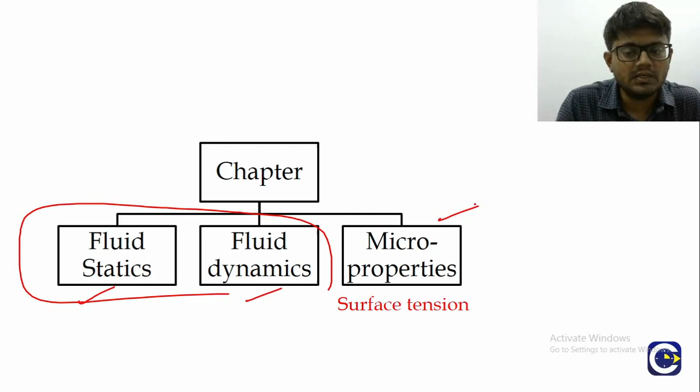Okay, so what is surface tension? Basically நம்ம day to day life we will do lot of observations. So இப்போ இங்க பாருங்க, ஒரு needle tip ல இருந்து we are releasing a water drop னு வெச்சுக்கோங்க. And the free state la the shape of the water drop பாருங்க இது எப்படி இருக்கா, spherical shape தானா? Okay, so when it is in free state it is taking the shape of a sphere.

இங்க மட்டும் கிடையாது, even if we look at the shape of the raindrops கொஞ்சம் distorted இருக்கும் because of the gravity effect, but கொஞ்சம் small drops நம்ம observe பண்ணா we will see that they will be almost like a perfect sphere. Okay வா, ஏன் இப்படி வருதுன்னா this is one of the effects of the surface tension.

அந்த மாதிரி we can also look at இது ஒரு ரொம்ப common experience, like the canal ஆகட்டும் or these marshy இதுல you will see that lot of mosquitoes and even these insects will be flourishing like anything. So they will flourish. We also will get affected because of some disease, etc.

Okay, so if you look at the way these mosquitoes or these insects will stay on the surface of the water, right? Like we can see here this insect paranga, it is keeping four legs abadi vechittu it is able to stay afloat on the surface of the water. How this is able to stay on the surface of the water? Again, this is because of the surface tension.

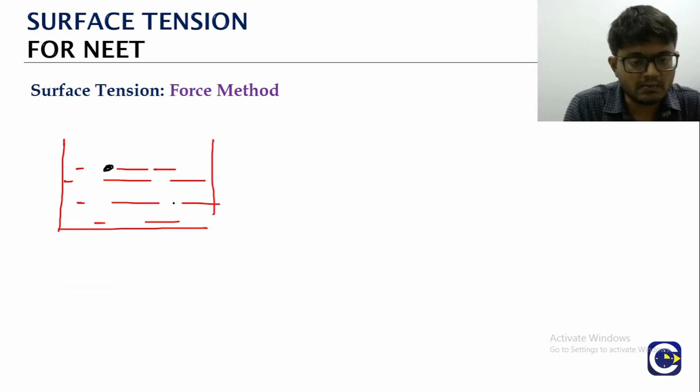Force method: for example நம்ம ஒரு vessel we are taking a liquid னு வெச்சுக்கோங்க, அதுக்குள்ள we will mark two liquid particles. இங்க பாருங்க, surface க்கு மேல ஒரு particle எடுக்கறோம், அந்த மாதிரி we will take a particle which is inside the liquid. இப்போ பாருங்க, the particle which is inside the liquid, the interaction forces with other surrounding particles அதெல்லாம் அப்படியே balance ஆயிடும். ஏன்னா that will be in all different directions. It will be attracted in all different directions. அதனால net force will become zero.

But surface க்கு மேல எடுத்தா அந்த point பாருங்க. This will only have the attractive forces in the lower hemisphere. மேல there is no liquid, right? அதனால it will only have the attractive forces in the lower hemisphere. அதனால the particles on the surface of the liquid will experience a net force downwards. Like somebody is just trying to pull them down. Because there is a net force downwards, there is always a tendency for these particles to go down, right?

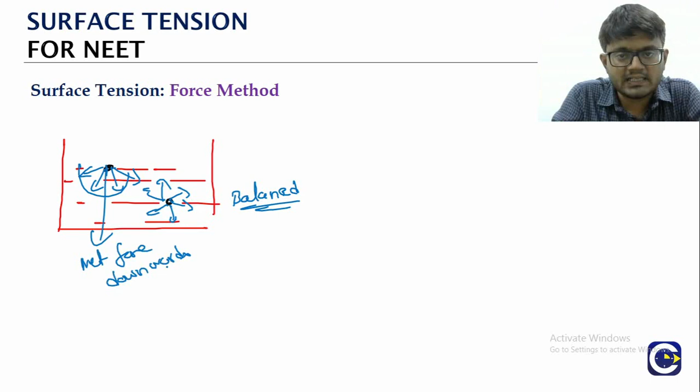So அதோட effect என்னன்னு பார்த்தீங்கன்னா the surface of the liquid will be always like ஒரு stretched membrane மாதிரி. So the surface of the liquid is going to be like what? It will be like a stretched membrane because of the unbalanced forces on the particles of that liquid surface.

இப்போ பாருங்க, இந்த சர்ஃபேஸ்க்கு மேல we are keeping ஒரு எக்ஸ்டர்னல் ஆப்ஜெக்ட் நம்ம பிளேஸ் பண்ண வச்சுக்கோங்க. ஒரு நீடில் ஆர் எனிதிங், wire or needle like that அப்படி நம்ம பிளேஸ் பண்ணா, because the membrane is stretched, right, அதனால என்ன தெரியுமா, there will be a force acting perpendicular to the length of the object.

நம்ம ஒரு wire மாதிரி ஒரு ஆப்ஜெக்ட் பிளேஸ் பண்ணா, there will be a force acting on the wire. It will be எப்படி இருக்கும், it will be perpendicular to the length of the wire. ஓகேவா? So it will be perpendicular to the length of the object. நம்ம எந்த ஆப்ஜெக்ட் அங்க பிளேஸ் பண்ணிருக்கோம் அந்த ஆப்ஜெக்ட்டோட length இது perpendicular இருக்கும்.

And இன்னொரு ப்ராப்பர்ட்டி என்னன்னா, this force will be along the surface of the liquid. எப்படி இருக்கும், the force will be along the surface of the liquid. இதுல இருந்து we will define the surface tension. பாருங்க, the surface tension generally என்னன்னா, we will indicate this with a symbol S or T. Capital S நம்ம யூஸ் பண்ணலாம், அந்த மாதிரி we can also use the symbol capital T.

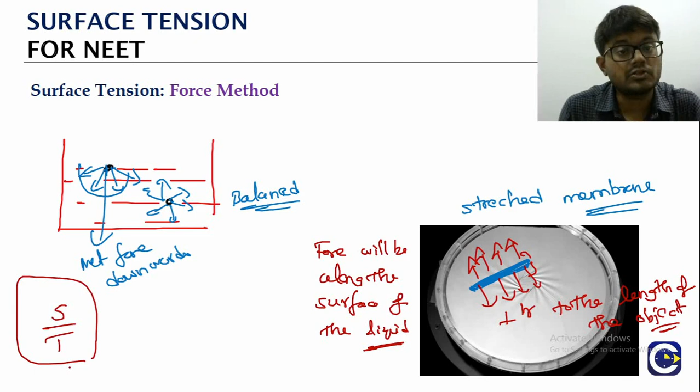Surface tension ன்னு சொன்னா this is not a force. ஏன்னா ஆல்ரெடி நமக்கு மெக்கானிக்ஸ்ல tension ன்னு சொன்னா the force inside the rope is called as tension. But surface tension ன்னு சொன்னா that is not a force. Okay, it is related to the force. எப்படின்னு பாருங்க, if you take what is the force acting per unit length, the object oda length நம்ம L எடுத்தா, the force acting per unit length of the object, right, that is what we will be defining as the surface tension.

ஓகேவா? Surface tension எப்படி நம்ம டிஃபைன் பண்றது, இப்போ நம்ம ஒரு wire or needle or a straight object நம்ம place பண்ணா, we can see what is the force acting per unit length. That is what we will be taking as the surface tension value. ஓகேவா? So இப்போ பாருங்க, based on this definition, what will be the SI unit? ஏன்னா force ஓட SI unit என்ன நியூட்டன், length ஓட SI unit என்ன மீட்டர். So it will be நியூட்டன் per மீட்டர்.

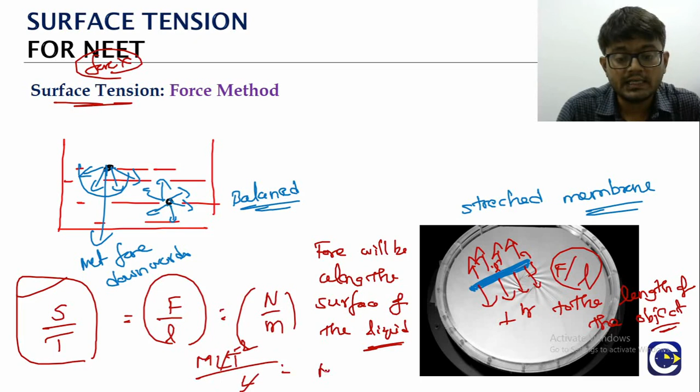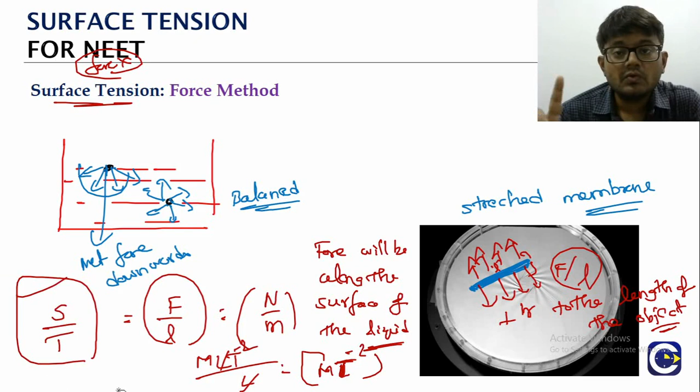அது மட்டும் இல்ல, we can also tell the dimensional formula. இங்க பாருங்க, force dimensional formula என்ன, M L T power -2 தானா, divide by length means L. So பாருங்க, L வராது, M T power -2. So this is the dimensional formula for the surface tension. Okay va? So this is how we will define the surface tension by using the force method.

Okay, so இப்போ பாருங்க, we can just look at the same in the observation. Like நம்ம ஒரு small weight needle surface of the water மேல place பண்ணா, you will see that the needle will be floating. ரொம்ப heavier needle place பண்ணா அப்படி float ஆகாது, ஏன்னா that will go down. But if you are keeping a light needle water surface மேல place பண்ணா, it will be floating on the surface of the water. ஏன் தெரியுமா? The reason is in the surface tension.

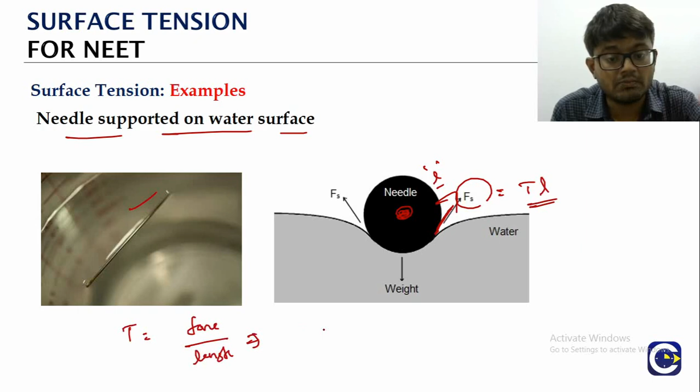அதுக்கு என்ன ஃபார்முலா பாருங்க, if the length of the needle நம்ம L எடுத்தா, force due to surface tension எவ்வளவு வரும், ஏன்னா surface tension is force by length தானா. So the force that will come due to the surface tension will be equal to surface tension value into the length. இந்த பக்கம் என்ன பாருங்க, it will be T into L. அந்த மாதிரி இந்த பக்கம் இங்க ஒரு surface இருக்கா, so it will be T into L.

So there will be two forces acting along the liquid surface. ஏன் இங்க along the liquid surface ன்னு சொன்னா it is not horizontal, because the membrane is dipping. இப்போ பாருங்க, இந்த ரெண்டு ஃபோர்ஸோட ரிசல்டன்ட் நம்ம எடுத்து வச்சுக்கோங்க. இங்க என்னன்னா we need to understand about one more thing called as the contact angle.

So எந்த ஓரியன்டேஷன்ல இது ஆக்ட் ஆகும்னு we will be able to understand this by using the concept of contact angle. கொஞ்ச நேரம் கழிச்சு we'll talk about the contact angle concept. அப்ப we will see what will be the direction of this force due to surface tension. இங்க அதோட ரிசல்டன்ட் நம்ம எடுத்தா it will be upward direction தானா.

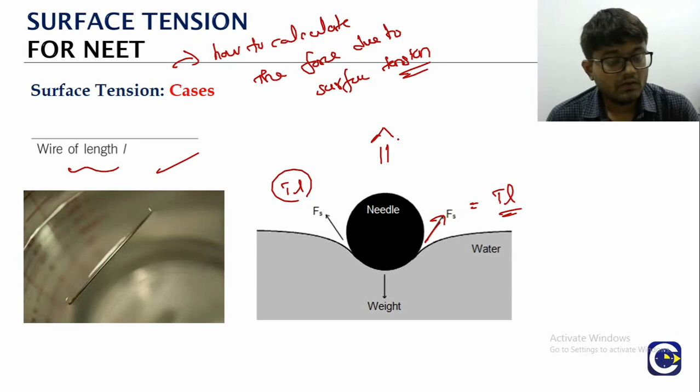Whatever is the angle, the net resultant will be upwards only, but the value changes depending upon the angle, right? The resultant's value changes. Okay? So because of that it is able to balance the weight of the needle, and that is why the needle will be able to float on the surface of the water. Okay? So this is the case of a single wire.

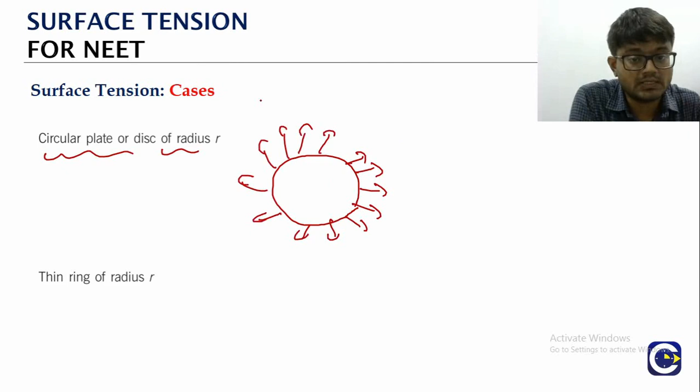Similarly, if you are keeping a circular plate or a disc of radius r, if we place a circular plate or a disc, see, what is the total length on which the force will be acting? The force will be acting on the entire circumference or perimeter, right? So what is the total length? It is the circumference or perimeter, 2 pi r, into the surface tension. Okay? So the force acting on a circular plate is 2 pi r into surface tension.

Similarly, if you take a thin ring of radius r, so what is the difference with a ring? The ring will have the mass of the material only on that outer boundary.

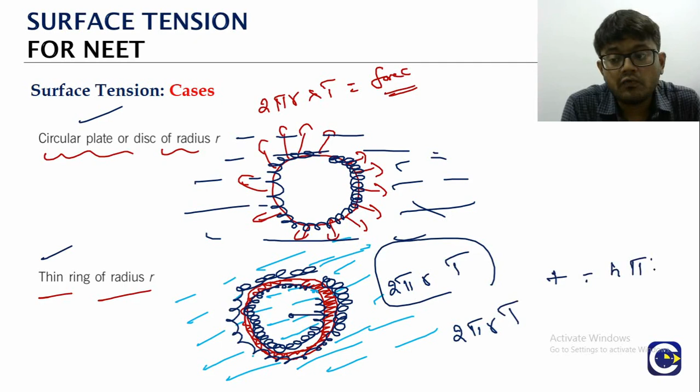So பாருங்க, if you consider the ring is thin, the inner radius க்கும் outer radius க்கும் அந்த அளவுக்கு டிஃபரன்ஸ் வராது. So we can take inner force to be 2 pi r into t. அந்த மாதிரி outer force is also 2 pi r into t. ஆட் பண்ணா it will be 4 pi r into t. Okay வா? Because the ring will have two boundaries. One the inner boundary, ரெண்டாவது outer boundary.

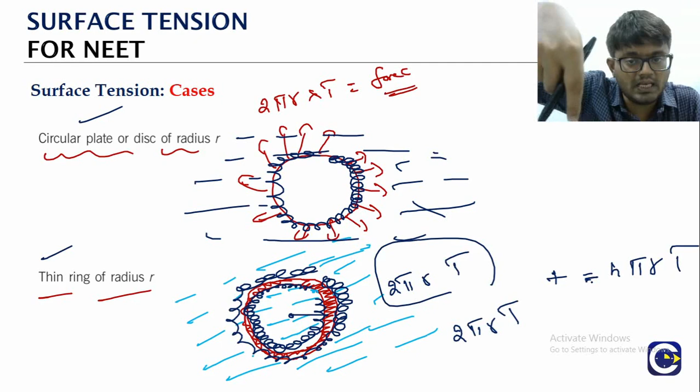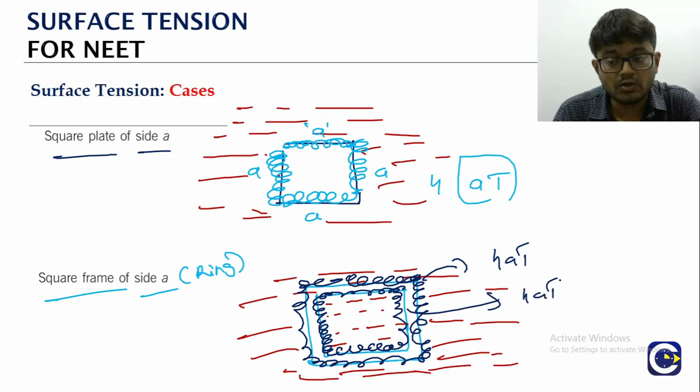So what we can take, this is like 4a into t. இதுக்கு முன்னாடி தான் ரிசல்ட் பார்த்தது. அந்த மாதிரி உள்ள இருக்கிறதுக்கும் ஒரு 4a into t வரும். டோட்டல் 8a into t. So square frame எடுத்தா 8a into t, because we are having two boundaries. அந்த மாதிரி if you take a hollow disc of inner radius r1, outer radius r2, it is also called as annular disc ன்னு சொல்லலாம்.

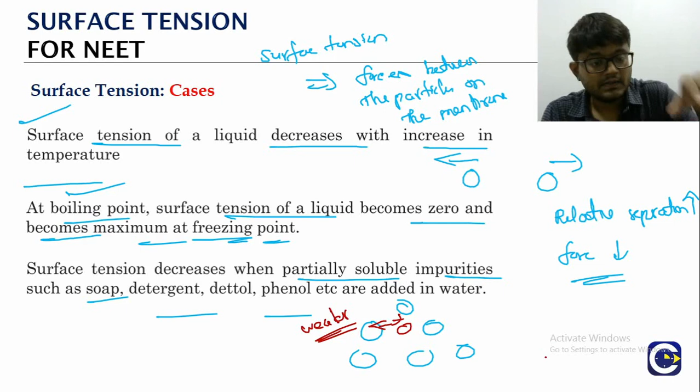The force of interactions between them are stronger, so the surface tension value will be increasing. In the same way, by giving a charge to a soap bubble...

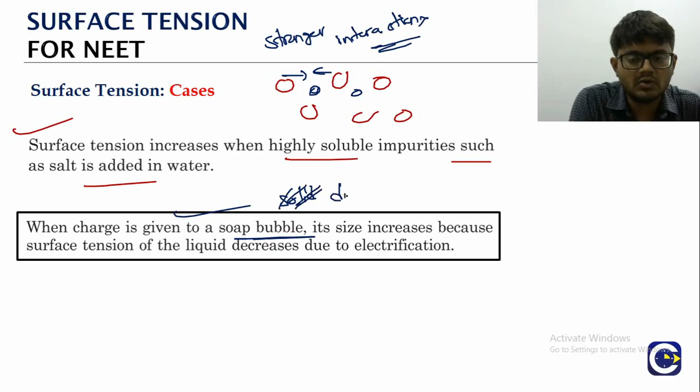How will a soap bubble be? The material will be only on the outer surface - the soap bubble material will be only on the outer surface. The difference between the two is - for a liquid drop it has only one surface. But soap is not like that.

If you take a soap bubble, what is it - there will be two surfaces there. If you take a soap bubble of radius r, assuming it's thin, neglecting that thickness, this is the outer surface, which is 4 pi r square.

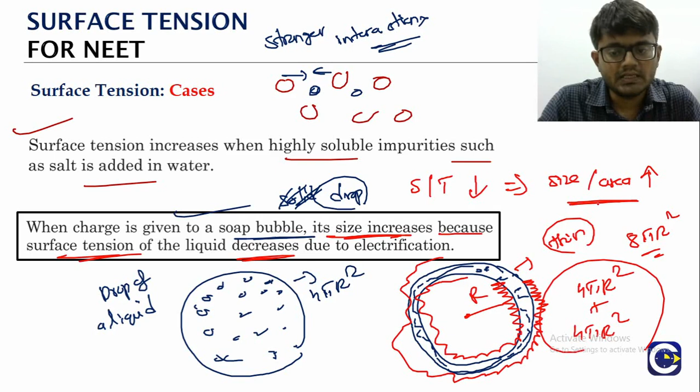So look at how - because the surface tension is decreasing, the size or area is able to increase. Having said this, we will be able to understand why the bubble's size increases once we learn about the surface tension concept using the energy method.

So now let's take a liquid surface. These are the particles of the liquid on the surface. The blue color marks the particles inside. Now let's mark an inside particle, and similarly we can also mark a particle on the surface.

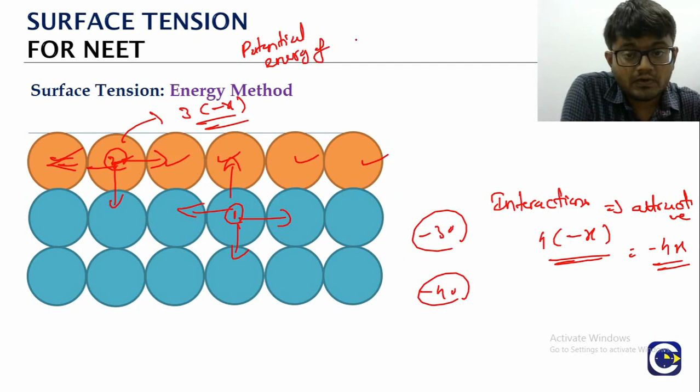If we say -40 versus -30, which is higher? Definitely -30 is a higher value, right? Which means the potential energy of particles on the surface is higher.

Comparing with the particles inside, the potential energy of the particles on the surface will be higher. So what does that mean?

Now let's consider creating a surface. How can we create a surface? We have to take the particles from inside and create the surface, right? So when we have to create a surface, we have to spend energy. Like if -40 energy level has to become -30, we have to supply 10, only then it becomes -30.

Which means we have to spend energy, we have to do work. So surface tension can be defined as the energy spent or work done, whatever we call it, to create a surface area, divided by the area value.

So what is the SI unit based on this? The energy or work done is Joule, divided by meter square. Before this, in the force method, we gave the unit as Newton per meter. The dimensional formula will be the same for both. But here we can also write the unit of surface tension as Joule per meter square.

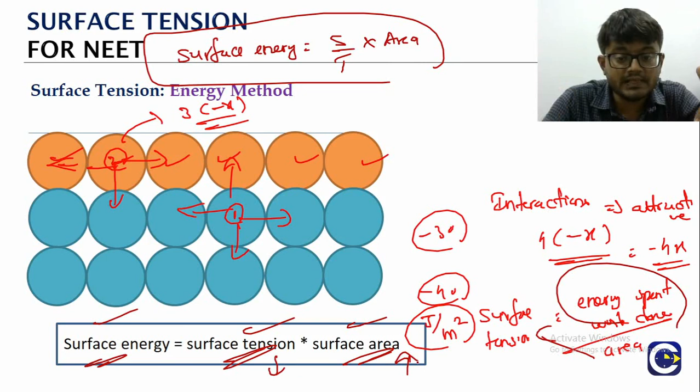Now what did we see before this? Surface tension is decreasing, right? If we give charge to a soap bubble, surface tension decreases. So the surface area has to increase so that the product remains the same. And if it's isolated, nobody is giving or taking any energy. So when surface tension decreases, surface area will increase so that the overall energy remains the same.

Similarly, look at mercury droplets - if you drop some mercury on the floor, we will see that they are almost spherical. If the size is somewhat large, it will be deformed - it will look distorted. But if small, it will look like a perfectly sphere.

Why does this happen? For a given volume of liquid, a sphere has the least surface area. We're not going to derive this here, we're just going to see the result.

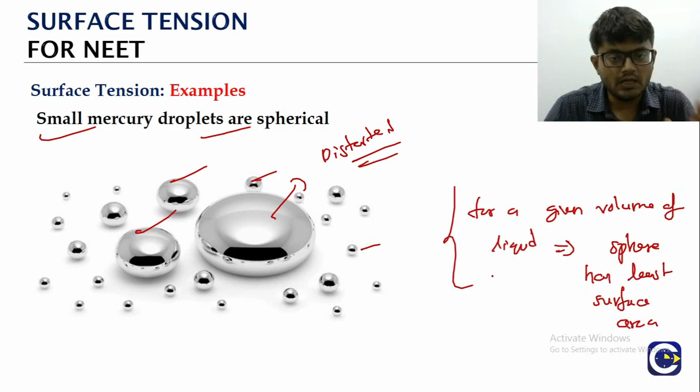Why is there importance for least surface area? Because of the surface energy formula - what is surface energy? It is the surface tension multiplied by the area value. If the area value is less, surface energy will also be less, because any free object in the universe always wants to take a low energy state or arrangement.

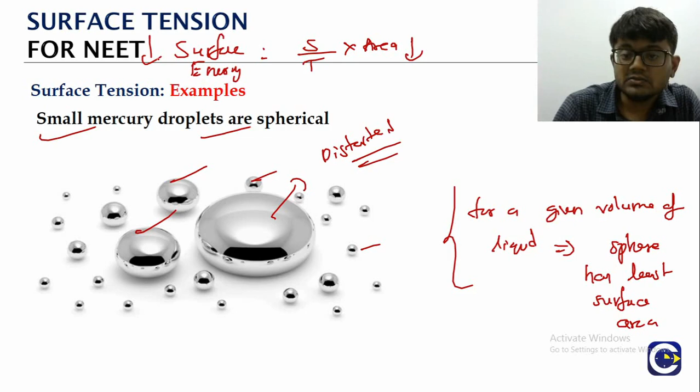So a free drop of water or even a free soap bubble, when we blow it, automatically nobody is giving it a spherical shape - it takes a spherical shape on its own. Because for a given volume of liquid, a sphere has got the least surface area, and least surface area means the corresponding surface energy will be least.

Like the raindrops or drops of water on the leaves of a plant, and the soap bubble too - they all take the spherical shape because for a given volume of liquid, a sphere has got the least surface area.

Like soil particles, if there is some moisture in them - moisture means water. The moisture will pull all these soil grains together, and pulling them together it will look like a solid, because the moisture is able to bring all the particles and grains together.

Why? Because if the grains are far apart, the liquid's surface boundary value will be higher, so energy will be higher. If they come together, the surface area of the liquid will be less. So the moist soil or grains are pulled together because the surface area of the thin film of water is reduced - always the tendency is to reduce the surface area.

Another thing you should know - if you generally observe the glass brought for the dining table or the showcase table, if you look at the edges, they will not be sharp, they will be rounded. Do you know why?

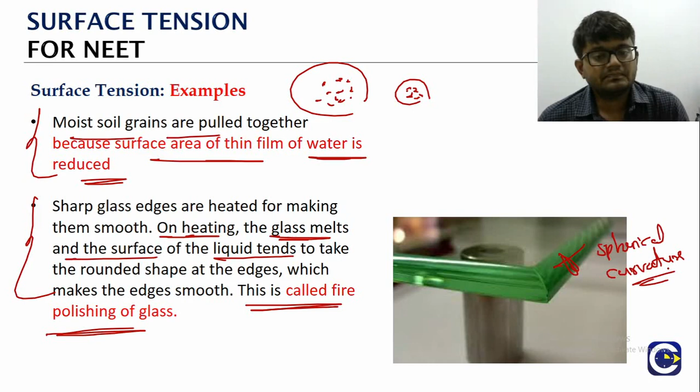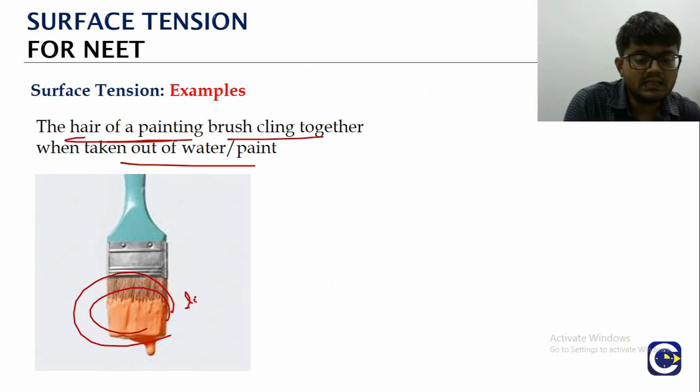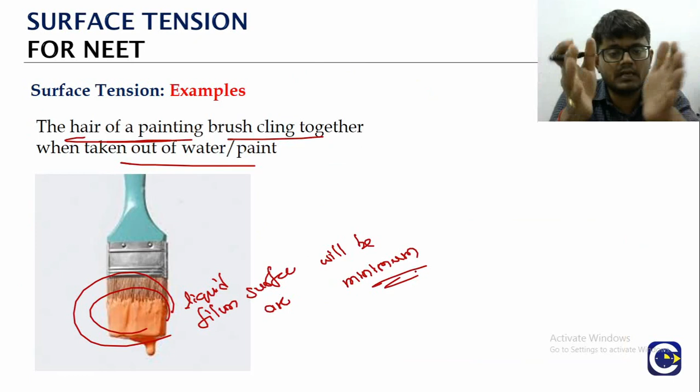Similarly, if you look at paint - when we dip a brush into the paint and take it out, we will see the hairs of the painting brush clinging together. Same reason - because the liquid film or surface area will be minimum. When the hairs of the brush are clinging together, the liquid surface area becomes minimum.

Based on this we can have a possibility for numerical questions also. Already in previous years we have gotten some questions on this - look, first, the work to be done in blowing a liquid drop.

Here, now we are having a liquid drop of radius r1. From that, by blowing it, we have to make it into radius r2. We have to move it from radius r1 to radius r2 - for that, what is the work to be done? When it is having radius r1, what is the surface area of the liquid drop?

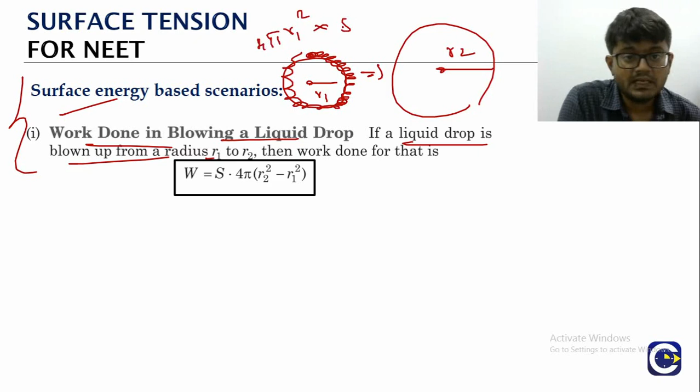4 pi r1 square. Surface area into surface tension will be what? Energy. This is the initial surface energy. Okay? Similarly, see what the final energy is. Final area? 4 pi r2 square into s. So what is the work to be done?

And definitely the final energy will be higher. That's why we have to do the work, right? So the work to be done will be final energy 4 pi r2 square into s minus initial energy. Take 4 pi into s common, and you get r2 square minus r1 square.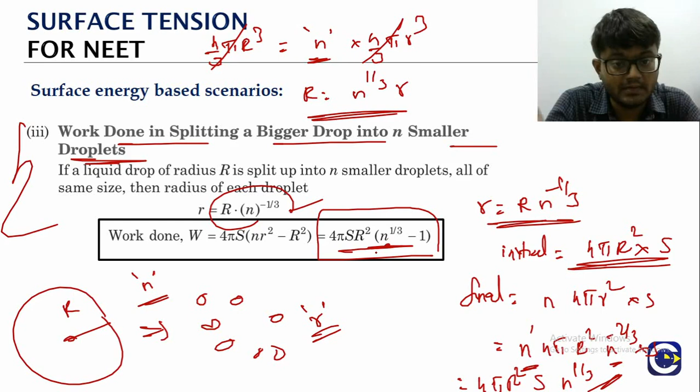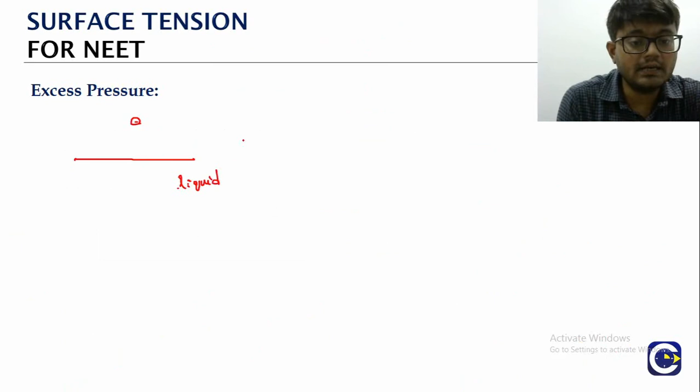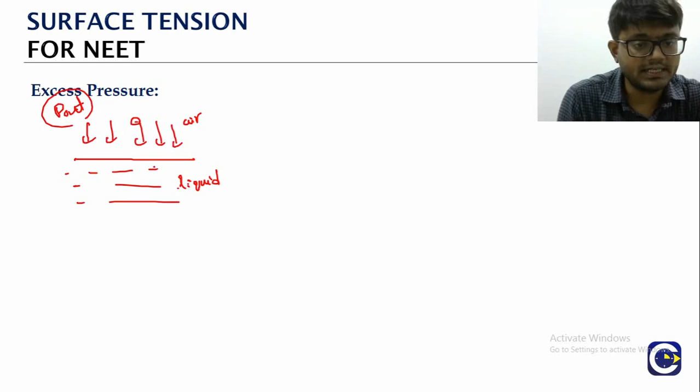Liquid and the other medium air னு வெச்சுக்கோங்க. So இந்த பக்கம் we are having the liquid particles, அந்த பக்கம் air particles. The interface flat or plane interface இருந்தா what is the meaning of that? இங்க பாருங்க, the force coming from outside depends upon the pressure outside and force coming from inside depends upon the pressure inside. Both should be equal, அப்படின்னா the surface will be flat. அப்படி இல்லாம if the surface is having a curvature இந்த மாதிரி இப்போ பாருங்க.

So inside it is like concave, outside convex. இது எப்போ possible ஆகும் பாருங்க. ஒரு flat surface நம்ம எடுத்துட்டு we are pushing it னு வெச்சுக்கோங்க. Inside pressure ஜாஸ்தியா இருந்தா compared to the outside pressure, the surface will be pushed outwards. So the inside pressure will be more than the outside pressure. இங்க we can talk about excess pressure.

So what is the concept? When the curvature of the liquid is not flat or plane, ஒரு curvature shape இருந்தா, then there will be excess pressure inside the liquid. That we will represent by delta P, that will be P inside minus P outside. That is what we call as the excess pressure. இப்போ we will try to see அதோட value எப்படி calculate பண்ணலாம்னு for some of the common liquid surfaces.

So first we will begin with the excess pressure inside a liquid drop. Liquid drop எடுத்தா we have pressure inside, pressure outside. The surface is not a flat or plane surface, it's having a spherical curvature. We want to find the excess pressure inside. அதுக்கு அந்த liquid drop ரெண்டு parts ஆ split பண்ணலாம். The lower hemisphere is in equilibrium, what is it?

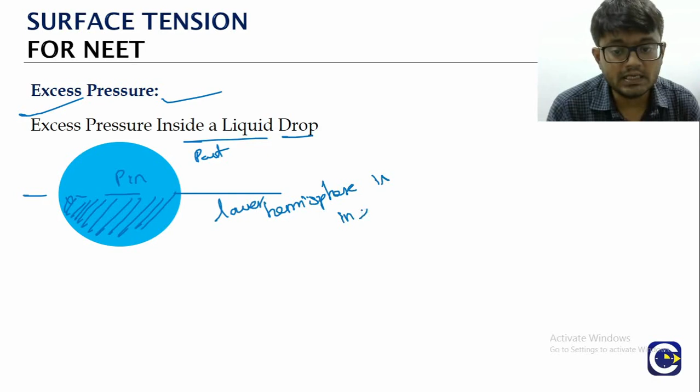Force balance. On the lower hemisphere, there will be a force acting due to the surface tension on the entire boundary. This is the full boundary. The boundary length எவ்வளவு வரும்? If you take the radius capital R, the boundary is 2 pi R. 2 pi R into surface tension T. That is the total force due to surface tension acting upwards.

அது மாதிரி inside pressure is more than the outside pressure. If the pressure difference delta P, that is the excess pressure, acts on the entire hemisphere area. But the effective area, the projection of the hemisphere area normal to the direction of the force, is pi R square.

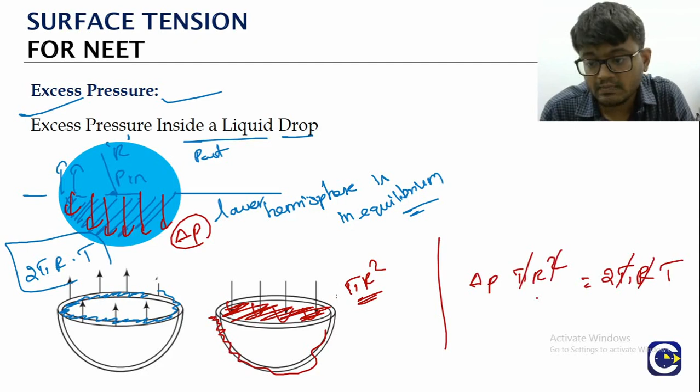So the force due to the excess pressure is delta P into pi R square. Equilibrium சொன்னா downward and upward both must be balanced with 2 pi R into T. So pi cancel ஆயிடும், ஒரு R cancel பண்ணலாம். So delta P is equal to 2T by R. So excess pressure inside liquid drop 2T by R. T is the surface tension, R is the radius of that liquid drop.

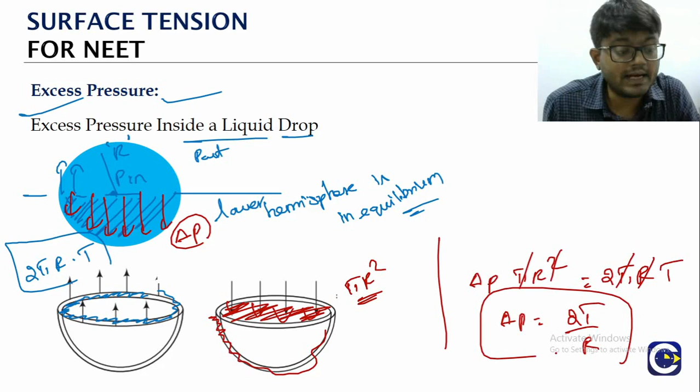அந்த மாதிரி soap bubble பாருங்க, difference என்ன? Soap bubble will have two spherical curvatures. Soap bubble case ல P inside ன்னு சொன்னா the absolute inside, the gap, total inside. P outside is the total outside. Bubble thickness குள்ள இருக்கிற pressure P ன்னு mark பண்ணா, first observe பண்ணுங்க, ஒரு spherical curvature வருது. So P inside minus P is equal to 2T by R.

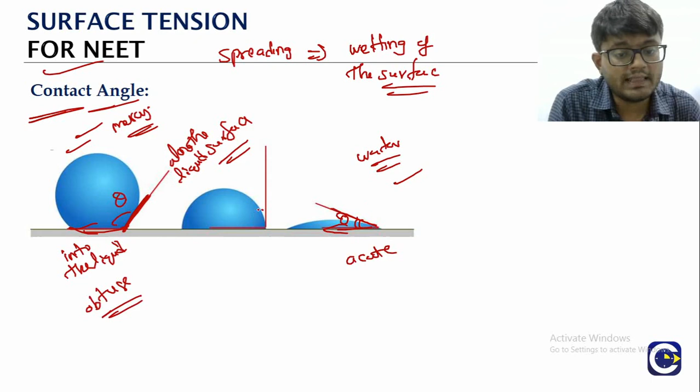Here we draw a tangent to the surface of the liquid. Like that we will draw a line along the solid surface which is taken into the liquid. What is the angle? It is an acute angle. And here, what is it? It is a right angle in the middle. Okay va. So the behavior of the liquid, whether it is wetting the solid or it is not wetting the solid, we know based upon the contact angle.

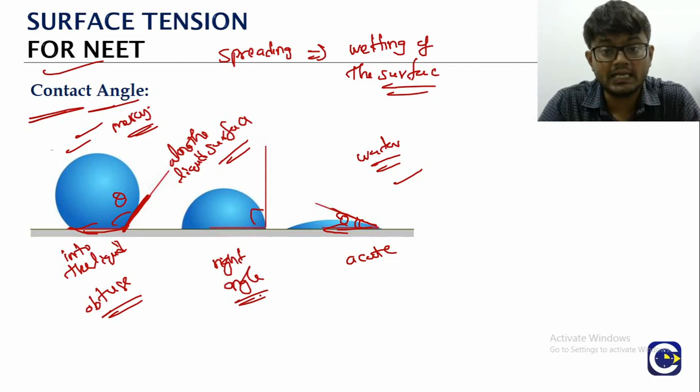We have two types of forces. One is cohesive forces between the molecules of the liquid. The force of attraction between same type of particles is called as what? Cohesive force dana. Adu onnu. Rendavathu enna? Adhesive force between the liquid and solid. The liquid particles ku solid naduvula irukra force adhesive force. That is the force between particles of different nature. Rendu attractive da. Okay. So first nama cohesive force paththi paarkalaam.

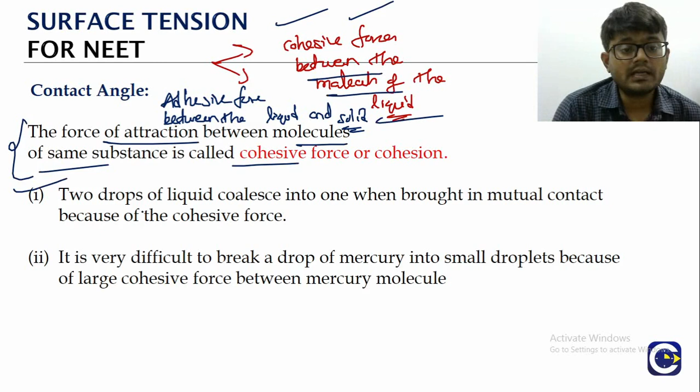The force of attraction between molecules of same substance. Inga particular enna, we talk about the cohesive force between the molecules of the liquid. So if you look at the coalescing case we discussed, if the drops of liquid are coalescing and forming a bigger drop, or bubbles are forming a bigger bubble, what is the reason for that? Because there are cohesive forces, attraction force irukku, adala they are able to coalesce and form a bigger drop. Okay va?

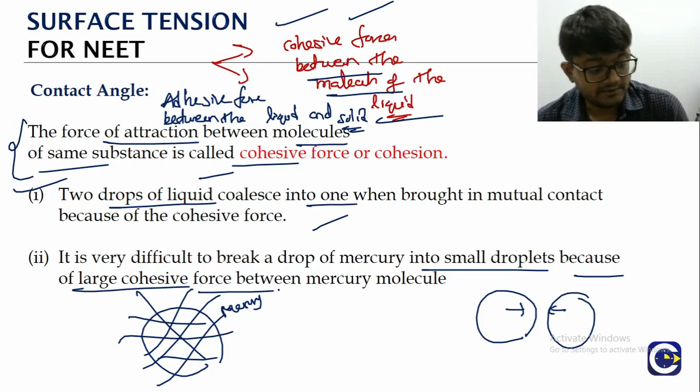The adhesive force enna? It is the force of attraction between molecules of different substances. Inga particularly we talk about what? The adhesive force between the liquid particles and solid surface particles. Okay va? So adu paththi thaan nama discuss panna porom.

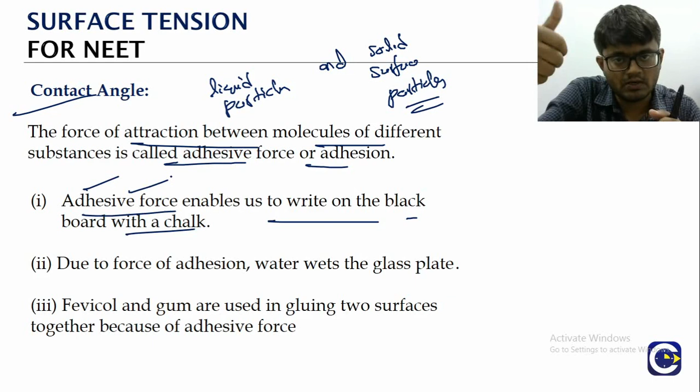Because of the adhesive force. The chalk particles go to the surface of the board. What is there? The adhesive force is there. And if you look at the reason why the water is able to wet: water is able to wet because if we are dropping the water on a glass plate,

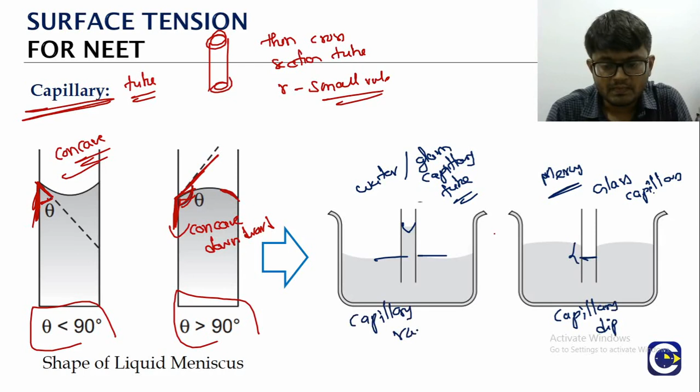Capillary rise happens when you have the contact angle less than 90, an acute angle, typically for water and glass. Capillary dip happens when you have a contact angle more than 90, an obtuse angle. At exactly 90 degrees, what happens? There will be no rise, no dip.

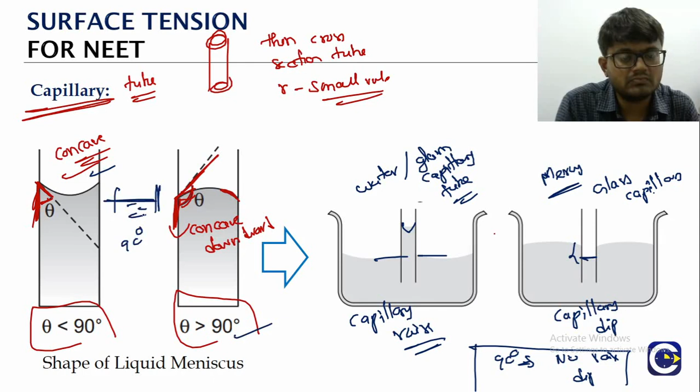At less than 90 contact angle, the meniscus shape is concave up. More than 90 means concave down. At exactly 90, the meniscus stays flat - the curvature change will be flat. That is the importance of 90 degrees.

So now we will calculate. Now numerically we will try to get one expression for the capillary rise. We assume that the liquid is rising to a height h, and we will try to calculate the value of this h. Here a meniscus-like shape forms.

It will be concave upwards. But for our calculation, if we neglect this slightly, we can almost assume it is like a cylinder. If we assume it is like a cylinder, what is the volume of the cylinder? Pi r square into h, taking r as the capillary tube radius.

Multiplying by rho, we get the mass of the liquid that is rising - this much liquid rising above, compared from the outside level. Multiplying with g, we get the weight of the liquid that is rising, because it is rising due to a force pulling it up. The equilibrium stage comes when the force pulling it up is balanced by the weight of the liquid - until then the rise keeps happening, and steady state comes when both forces are balanced.

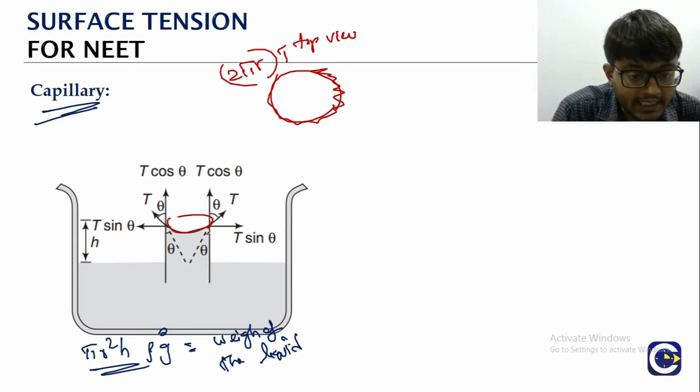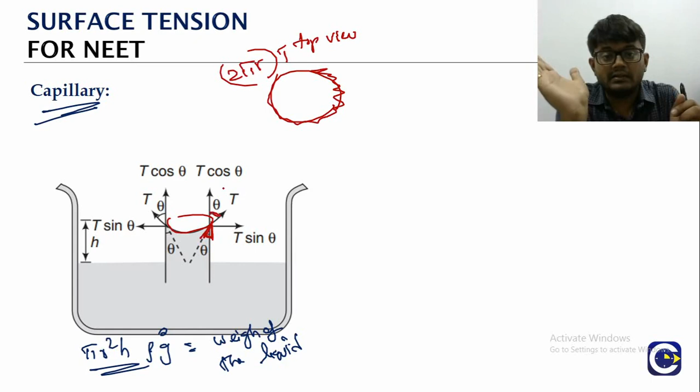But here notice the contact angle - we expressed this contact angle before. On this side theta, and on this side theta, are vertically opposite angles. The force due to surface tension acts at an angle theta with the vertical. Looking at the vertical direction, the curvature is like this - everywhere, the force acts at angle theta with the vertical, so its vertical component is simply t cos theta.

The vertical component comes out to be t cos theta.

Horizontal component: on this side of an element we take T sin theta horizontal. Opposite to it, there will be another element also T sin theta, so the two cancel out. So we will only have the vertical component, T cos theta. Now 2 pi r into T gives the overall force, but we need to take only its vertical component.

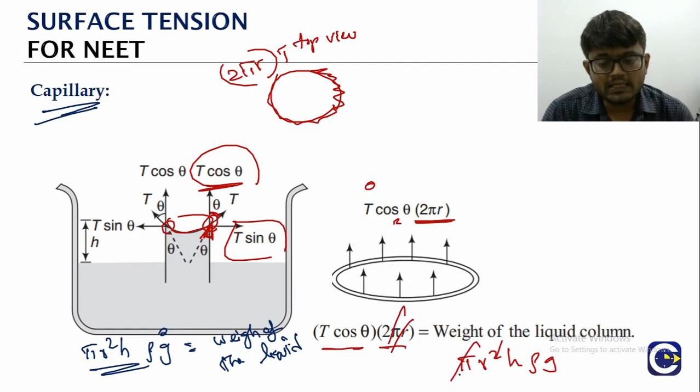That is because this is the force that balances the weight of the liquid column. So T cos theta into 2 pi r is equal to pi r square h into rho into g. Pi cancels, one r cancels, and since we need h, we get 2T cos theta by r rho g.

From this we can expect some theoretical questions. The capillary rise depends on the surface tension value: T higher means h will be higher. Similarly, r higher means h will be lesser since r is in the denominator. So based on this formula, 2T cos theta by r rho g, we can have theoretical questions.

Now if we take contact angle as 0, because for water and glass we take it as 0, then cos 0 comes in, so the h value becomes 2T by r rho g. That's the h value when the contact angle is 0.

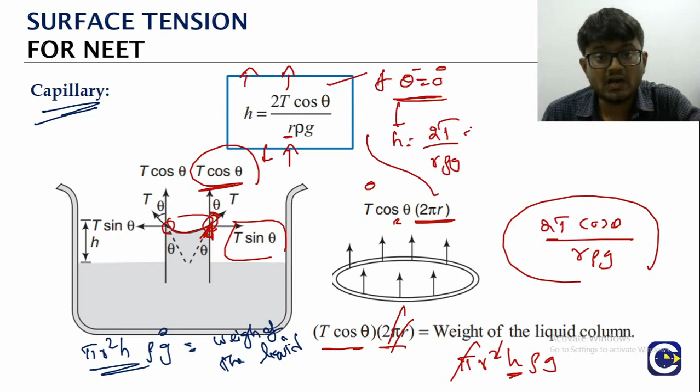Before this, we had taken the capillary tube to be held vertical, and from that we got the value of h, with the formula 2T cos theta by r rho g.

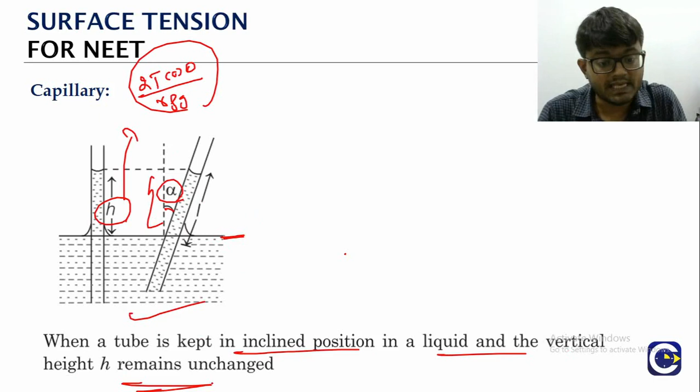Now suppose we tilt the tube, making an angle alpha with the vertical. The height of the liquid above the outside level remains the same. So if the tube is placed in an inclined position, the vertical height h remains the same, but the length of the liquid column definitely changes.

Because if you observe this right angle triangle, cos alpha is h by L, adjacent by hypotenuse. From that we get the value of L: L is equal to h by cos alpha.

We already have the formula for h, which is 2T cos theta by r rho g. Because the force balance means the height of the liquid inside the capillary tube above the outside level remains the same — h stays the same, but the length of the liquid column L changes. The formula for that is L equals h by cos alpha.

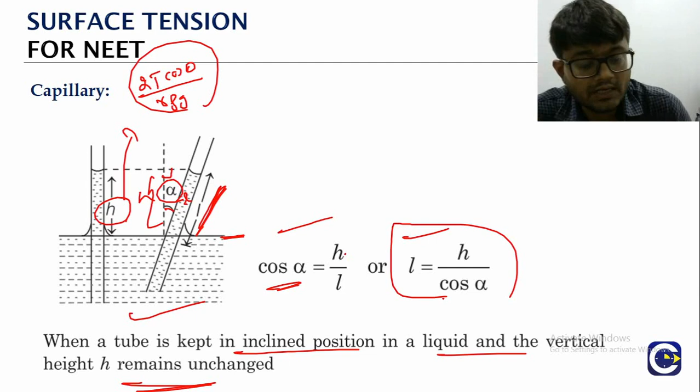So what is alpha? It is the angle made by the tube with the vertical.

Now a doubt: from this formula we get the h value as 2T cos theta by r rho g. Say for example this comes out to be about 20 mm.

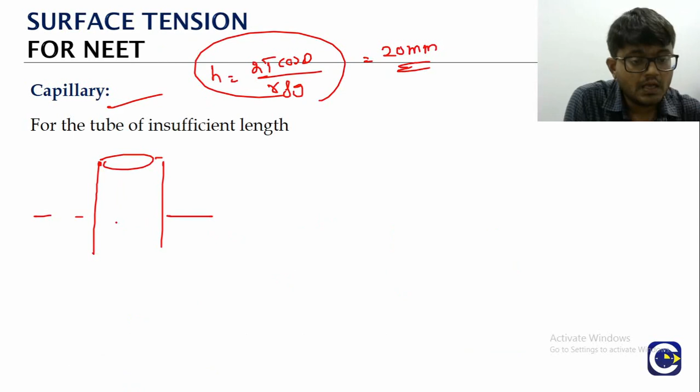So here's the situation we have: we are holding a capillary tube and keeping it inside a liquid. Suppose the available length is only 4 mm.

So the doubt is, what is going to happen? Because it definitely has to rise up to 20 mm, since that is the capillary rise value, but here the available length is only 4 mm. So what happens? You might generally think the liquid is going to overflow.

But that doesn't happen. If we take an insufficient length tube, the liquid is not going to overflow. Instead, the curvature of the liquid, or the contact angle, is going to change.

The liquid right at the edge, the interface, will change its curvature. The curvature there will change. Normally the curvature looks a certain way.

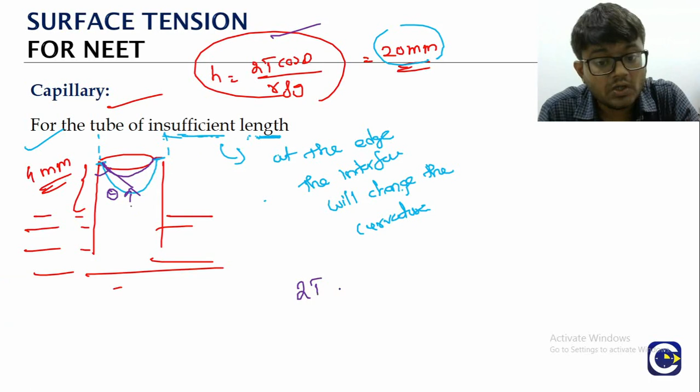What happens as a result? Theta is increasing. As theta increases, looking at the formula 2T cos theta by r rho g, cos theta's value decreases, which means since the contact angle is changing, the corresponding capillary rise value also changes.

So the curvature will finally adjust such that the liquid will not overflow.

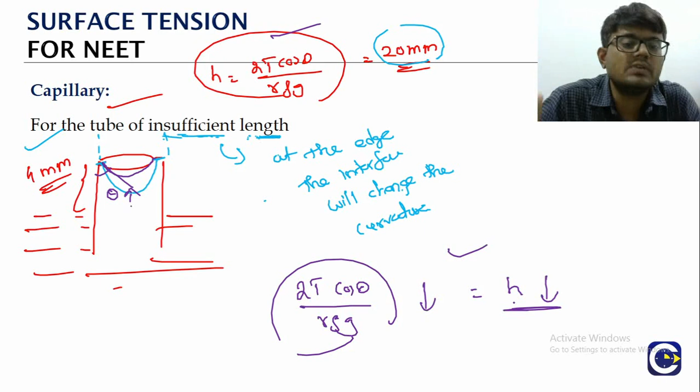And the liquid overflow concept won't happen. So what will happen is the curvature of the liquid at the edge will change. That's all, so let's look at capillary action examples and applications that we see in day to day life.

If you look at the oil lamp, kerosene lamp and that kind of thing, what is there? We will have a wick. If you look inside this wick, you will have small pores, it's like a capillary. So the kerosene or the oil will be rising through that wick, that is due to the capillary action.

Similarly if you look at ink pens, at the nib end there will be a split. This split acts like a capillary. The ink will be just dropping because of gravity, but due to the capillary effect it will be taken back. So the ink will be rising up to the tip because of capillary action.

If you take a very common example, like you take a bucket of water and a towel, and you place the end of the towel into the water, after some time you will see that the other end also will become slightly wet. This is because of the porous nature of the towel, we will see the capillary action and the water will move and come up.

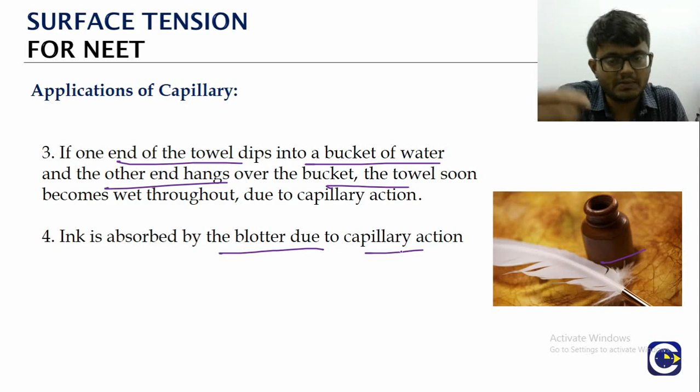Similarly, if you look at old movies you will see this ink blotter. Nowadays in recent times we don't even think of it. Ink blotter, they used to dip it into the ink and then write. So there also it's the same, this ink blotter works because of capillary action. So because of the capillary effect the ink will go in.

Even the plants, they take the water. In the soil, the soil has a porous surface, and because of this porous structure it's like a capillary. This capillary action helps us see the water level rising from the lower levels of the earth's surface to higher levels because of the porous soil. And even within the plant, in the stems or roots, capillary action will play an important role in carrying the water through the plants or trees.

So overall, we will have some very important common day-to-day applications of this surface tension. If you are having a wound or something, we have to wash the wound, and for that we need more wettability.

Surface tension is high means what? If surface tension is more, wettability will be less. So for that we will be taking some materials like Dettol, which will lower the surface tension. When we put that, what is going to happen? That substance is going to spread more evenly. So wherever the surface tension is less, the wettability will be more. So for cleaning we need to have more wettability.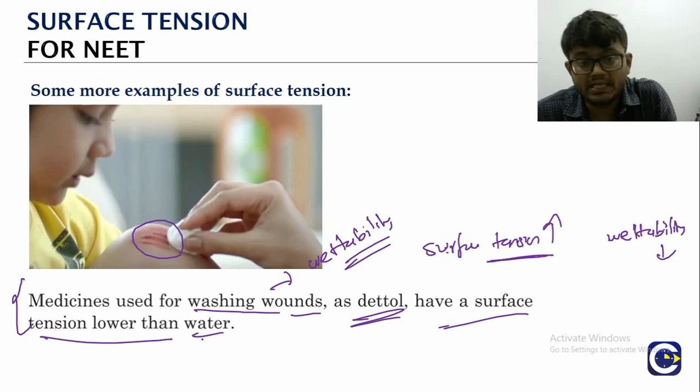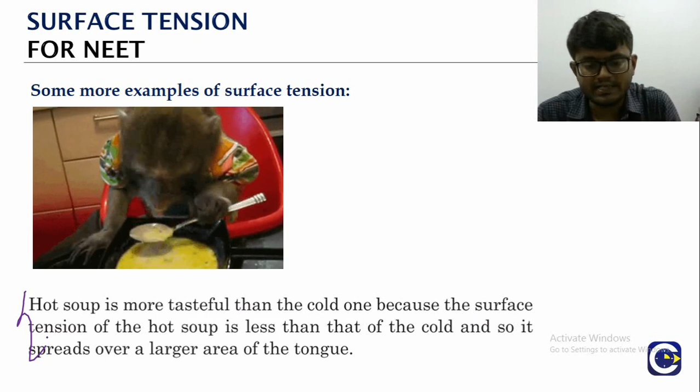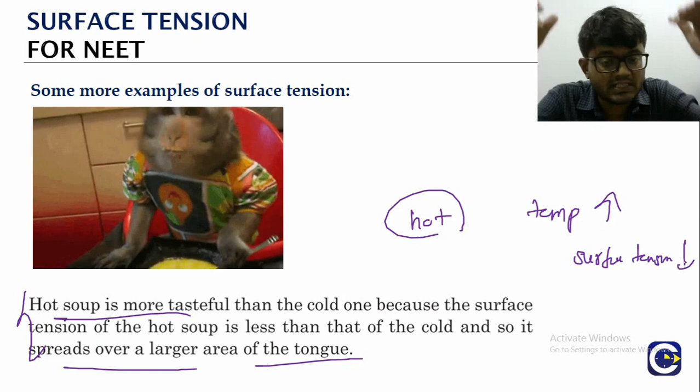And even the reason why we like eating hot soup - not just hot soup but tea or any of these refreshing drinks, we'll prefer them to be hot. Because hot soup will be able to spread more on the area of the tongue. Because hot means temperature is more, and when temperature is more, surface tension will be less. So when the surface tension is less, the liquid will be able to spread more evenly, and we will be able to feel the real taste of the soup.

Even in the animals also we will appreciate that.

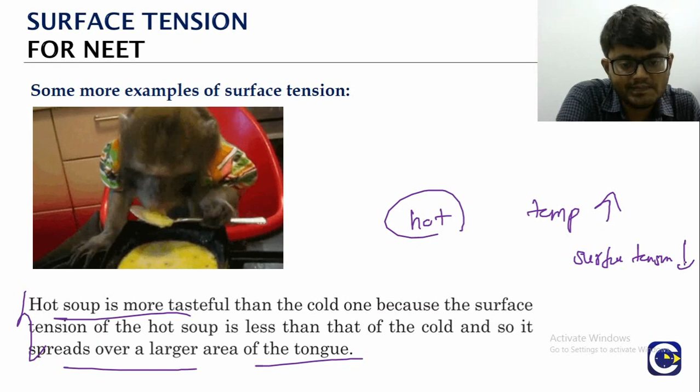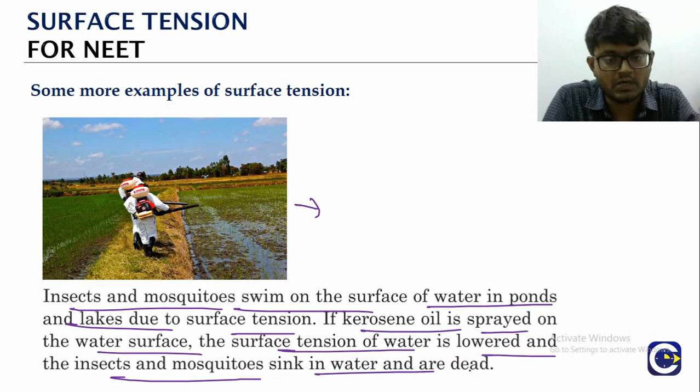Initially we discussed that mosquitoes or insects happily live on the surface of water or marshy land. When they spray kerosene, the mosquitoes and insects, which were able to stay on the surface of the water, but when kerosene or any similar substance is sprayed, what happens is the surface tension of the water is reduced. The insects and mosquitoes will not be able to stay on the surface, and the insects, mosquitoes, larva, whatever it is, will sink, and that will lead to their death. So these are the applications of surface tension in a very practical sense.

So this is about the concept of surface tension and its applications. From the numerical perspective, surface energy calculations and the concept of capillary rise are important. For theoretical questions, we will have either reasoning based questions or surface tension and applications based questions. We will see in the next chapter.